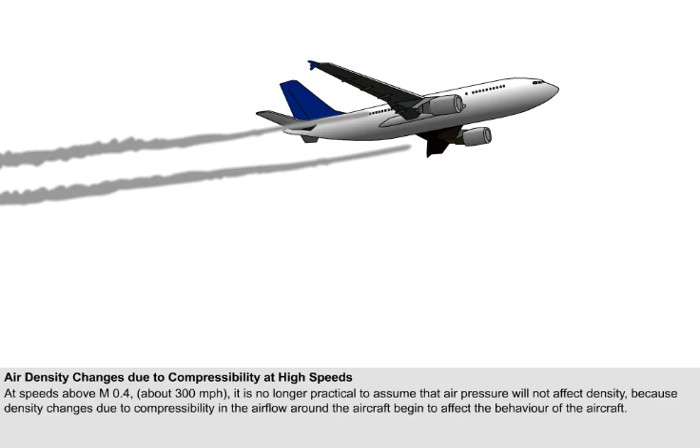At speeds above Mach 0.4, which is about 300 miles per hour, it is no longer practical to make that assumption, because density changes in the airflow around the aircraft begin to affect the behavior of the aircraft.

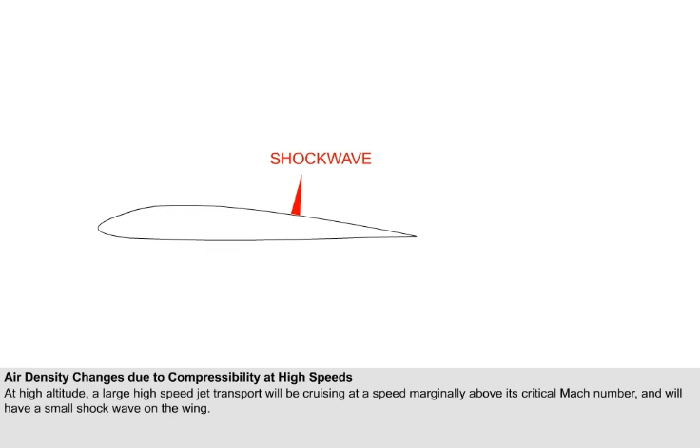At high altitude, a large high-speed jet transport will be cruising at a speed marginally above its critical Mach number, and will have a small shock wave on the wing. If the aircraft's speed is increased, the shock wave will rapidly grow larger, causing the static pressure to increase sharply in the vicinity of the shock wave.

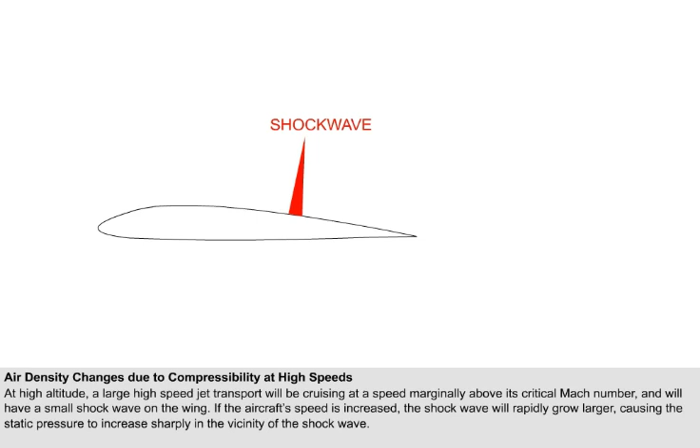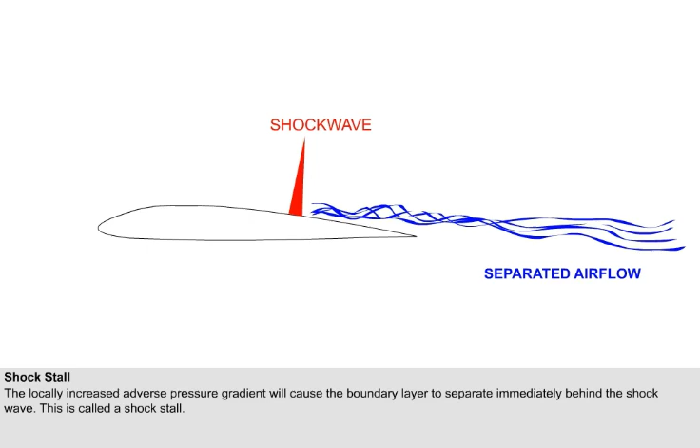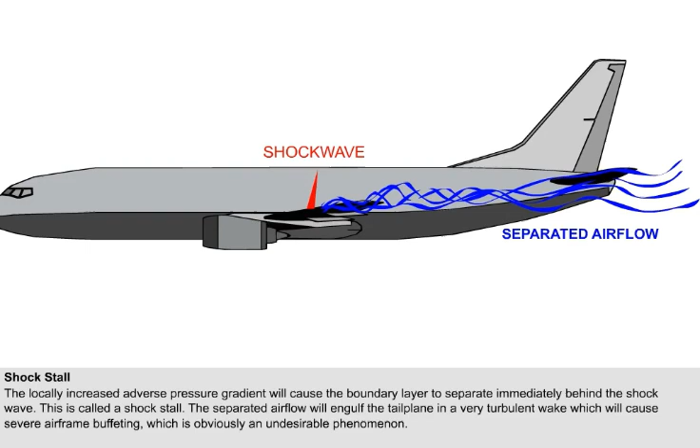The locally increased adverse pressure gradient will cause the boundary layer to separate immediately behind the shock wave. This is called a shock stall. The separated airflow will engulf the tailplane in a very turbulent wake, which will cause severe airframe buffeting, obviously an undesirable phenomenon. This high-speed buffet, or shock stall, can seriously damage the aircraft structure.

So an artificial warning device is installed to alert the flight deck crew if the aircraft exceeds its operational speed limit by even a small amount. The limits are VMO, the maximum operating indicated airspeed, and the equivalent Mach number, MMO.

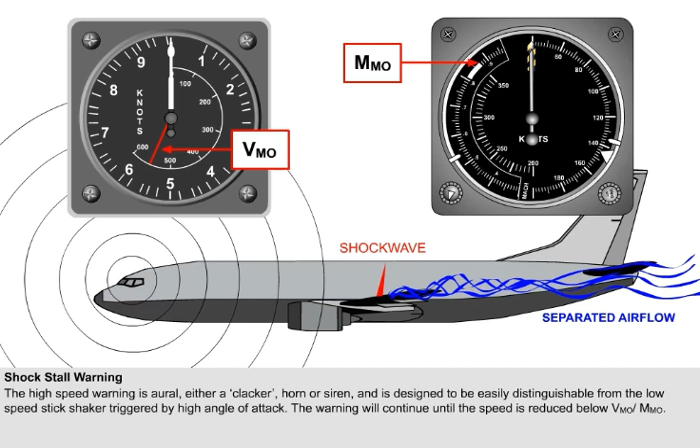The high-speed warning is aural, either a clacker, horn, or siren, and is designed to be easily distinguishable from the low-speed stick shaker triggered by high angle of attack. The warning will not be cancelled until the speed is reduced below the speed at which it is triggered.

You have learned that approaching the critical angle of attack can cause airframe buffeting, low-speed buffet. And we have now shown that flying too fast can also cause buffet, high-speed buffet.

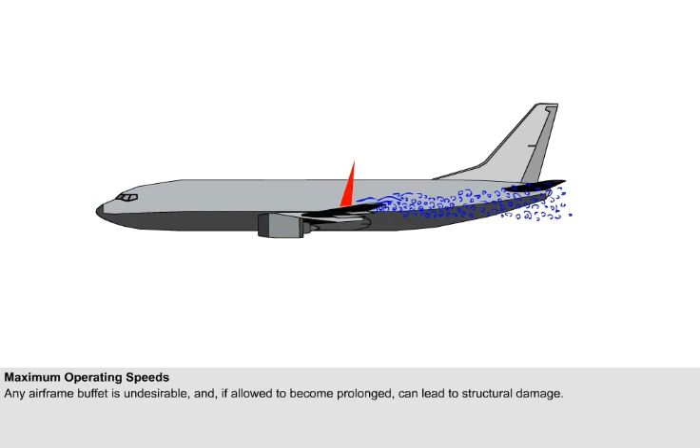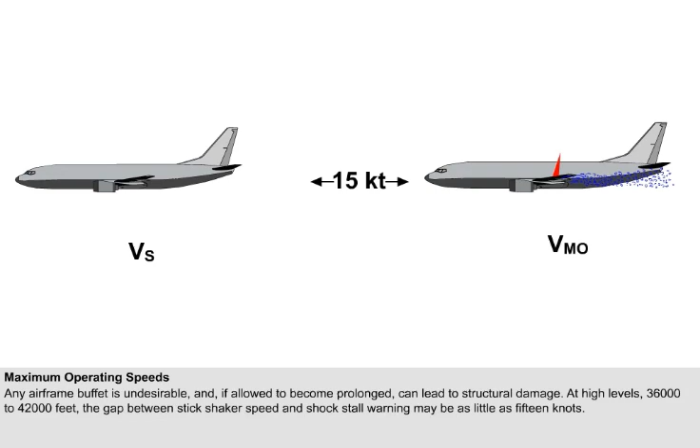Any airframe buffet is undesirable, and, if allowed to become prolonged, can lead to structural damage, as well as upsetting the passengers. At high cruising levels, around 36 to 42,000 feet, the margin between the normal stall warning stick shaker and the high-speed warning may be as little as 15 knots.

High speeds are operationally necessary, and designers are constantly trying to find ways of increasing maximum speeds without incurring any undesirable flight characteristics.

The limits mentioned just now, VMO and MMO, are investigated and established during certification flight testing of new types. These maxima give a speed margin into which an aircraft can momentarily overspeed and be recovered by the pilot before any undesirable effects occur. This lesson concludes the series on stalling.

The problems incurred by shock stall, such as tuck, loss of control effectiveness, and instability, are covered in detail in the lessons on high-speed flight.